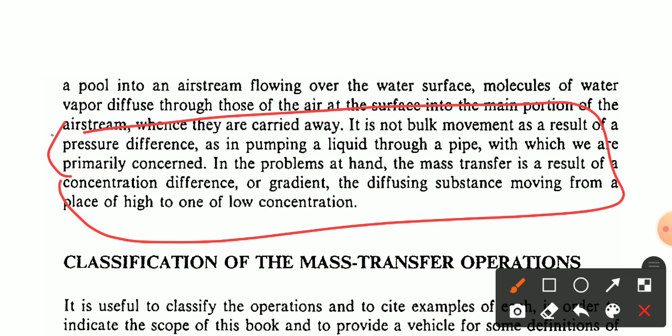Mass transfer does not result in a bulk movement as a result of pressure difference, as in pumping a liquid through a pipe, with which we are primarily concerned. In the problems at hand, the mass transfer is a result of a concentration difference and gradient. The diffusing substance is moving from a place of high to one of low concentration. This is called the mass transfer operation.

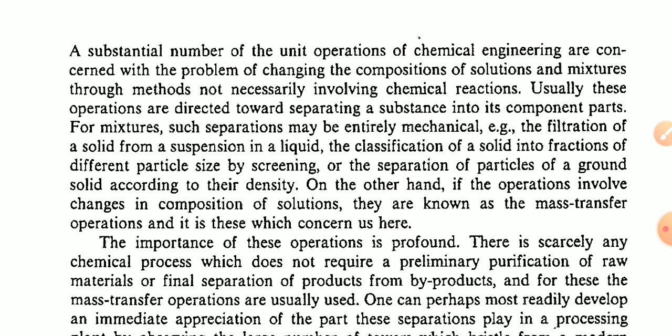On the other hand, any operations involving change in the composition of solution are known as mass transfer operations, and it is these which concern us here, for some reasons of importance.

There is scarcely any chemical process which does not require a preliminary purification of the raw material or a final separation of products from byproducts, and for this, mass transfer operations are usually used. One of the most readily developed and immediate appreciations of this can be seen.

This separation plays a role in processing plants, as observed by the large number of towers bristling from a modern petroleum refinery, in each of which mass transfer separation operations take place frequently.

The major part of the cost of some processes is for separation. This separation and purification cost depends directly upon the ratio of final to initial concentrations. When this ratio is very large, the product cost is also large.

Thus sulfuric acid is relatively low priced, the product in part because sulfur is found naturally in a relatively pure state. Whereas pure uranium is expensive because of its low concentration.

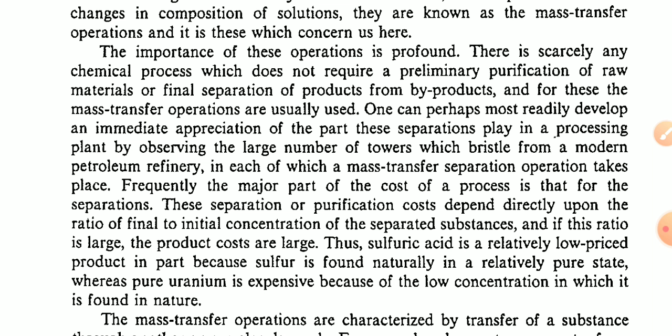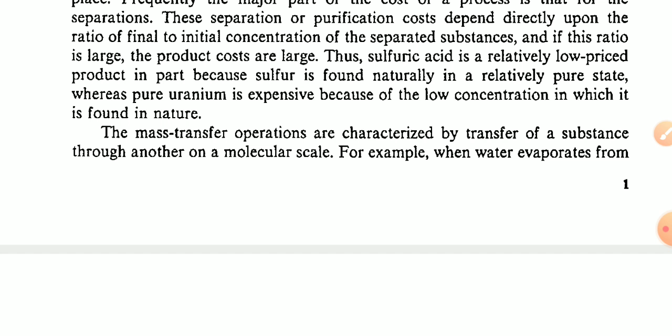Mass transfer operations are characterized by the movement of substances through another on a molecular scale. For example, when water evaporates,

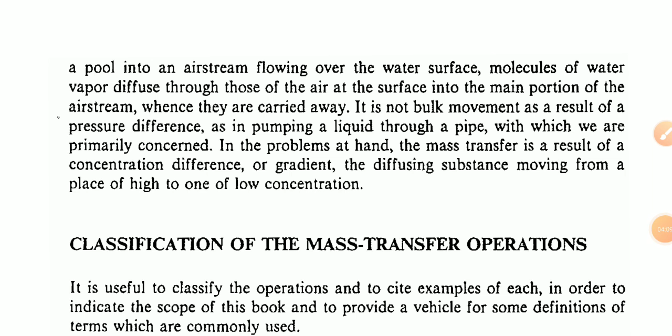a pool into the air streams flowing over the water surface, some molecules of water vapor diffuse through those of the air at the surface into the main portion of the air stream, where they are carried away. It is not bulk movement as a result of pressure differences, as in pumping a liquid through a pipe, with which we are primarily concerned.

In the problems at hand, the mass transfer is a result of a concentration difference and gradient. The diffusing substance is moving from a place of high to one of low concentration.

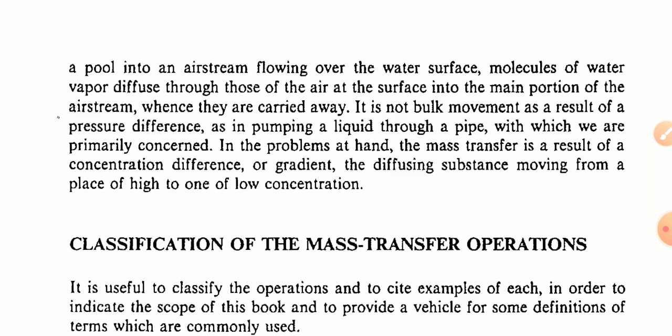Now, most important point: classification of the mass transfer operations.

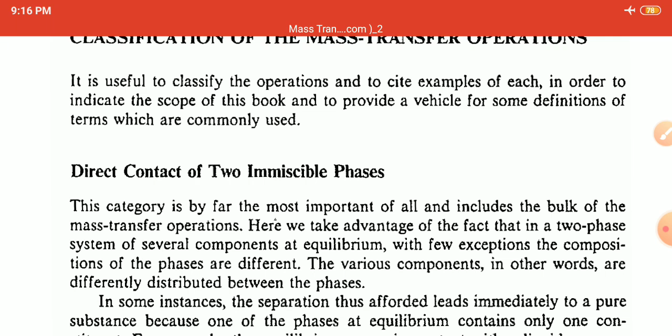the compositions of the phases are different. In other words, components are differently distributed between the phases on some basis.

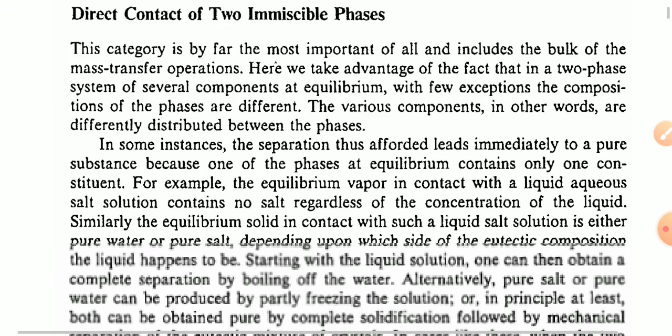In some instances, the separation thus afforded leads immediately to a pure substance, because one of the phases at equilibrium contains only one constituent. For example, the equilibrium vapor in contact

with a liquid aqueous solution contains no salt, regardless of the concentration of the liquid. Similarly, the equilibrium solid in contact with such a liquid salt solution is either pure salt or pure water, depending upon which side of the eutectic composition we are on.

And if we start with the liquid solution, one can then obtain a complete separation by boiling off the water,

alternatively, pure salt or pure water can be produced by partly freezing the solution, or in principle at least, both can be obtained pure by complete solidification followed by mechanical separation.

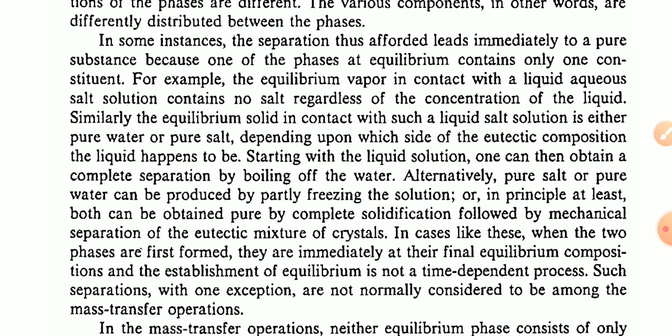In cases like this, when two phases are first formed, they are immediately at their final equilibrium compositions, and the establishment of equilibrium is not a time-dependent process. Such separations, with one exception, are not normally considered to be among the mass transfer operations.

In the mass transfer operation, neither equilibrium phase consists of only one component. Consequently, when the two phases are initially contacted, they will not be of equilibrium compositions. The system then attempts equilibrium by relatively slow diffusive movement.

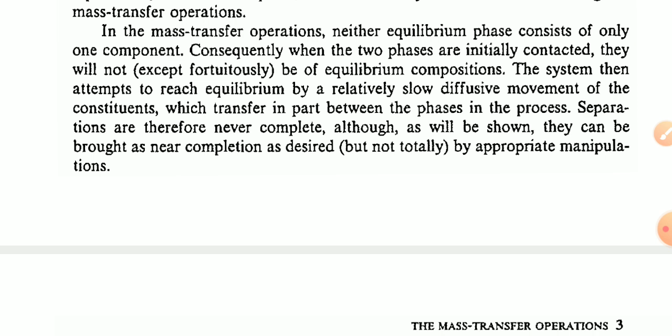This constitutes transfer in part between the phases. In the process, separations are therefore never complete, although as will be shown, they can be brought as near to the desired compositions as wanted, but not totally, by appropriate manipulation.

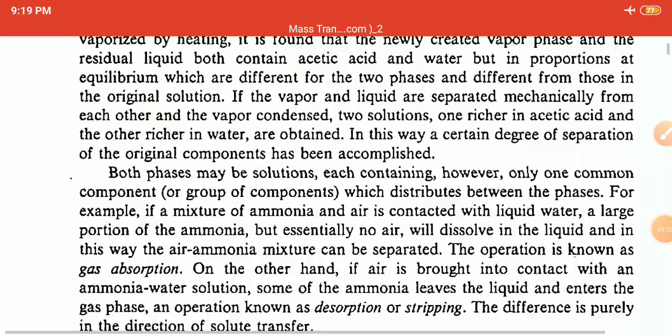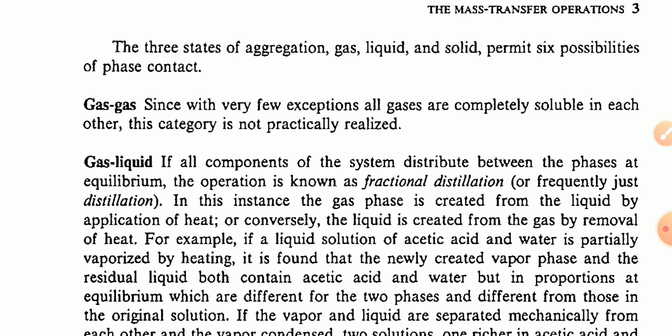For example, if a liquid solution of acetic acid and water is partially vaporized, the residual liquid and vapor both contain acetic acid and water, but in proportions at equilibrium which are different for the two phases and different from those in the original solution. If the vapor and liquid are separated mechanically from each other and the vapor condensed,

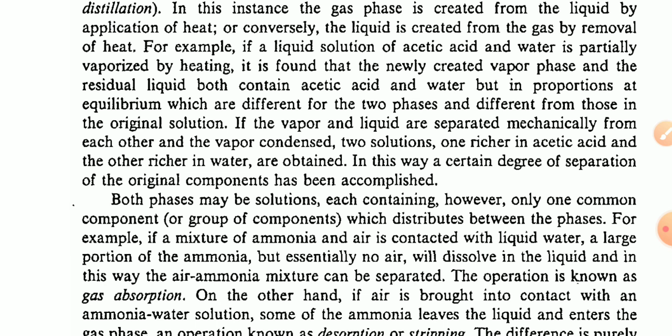but essentially no air will dissolve in the liquid, and in this way the air-ammonia mixture can be separated. The operation is known as gas absorption. On the other hand, if air is brought into contact with an ammonia-water solution, some of the ammonia leaves the liquid and enters the gas phase.

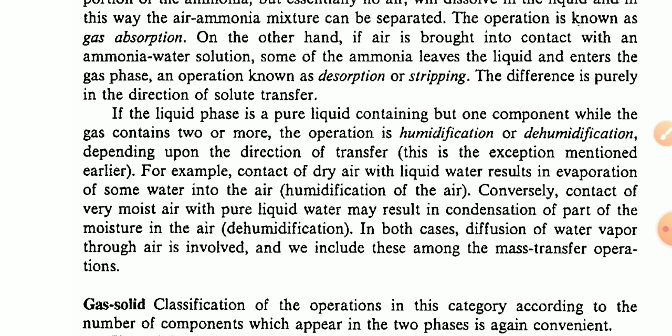If a solid solution is partially vaporized without the appearance of a liquid phase, the newly formed vapor phase and the residual solid each contain all the original components but in different proportions, and the operation is fractional sublimation.

And as in distillation, the final compositions are established by interdiffusion of the components between the phases.

While such an operation is theoretically possible, it is not generally done because of the inconvenience of dealing with solid phases in the manner required, on different bases.

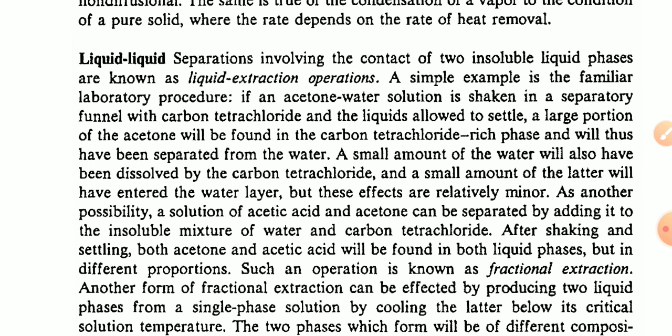Another form of fractional extraction can be effected by producing two liquid phases from a single phase solution by cooling the latter below the critical solution temperature. The two phases which form will have different compositions.